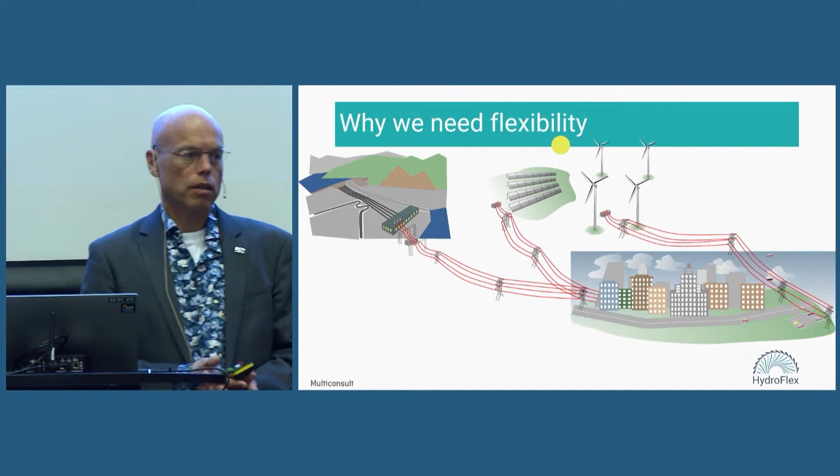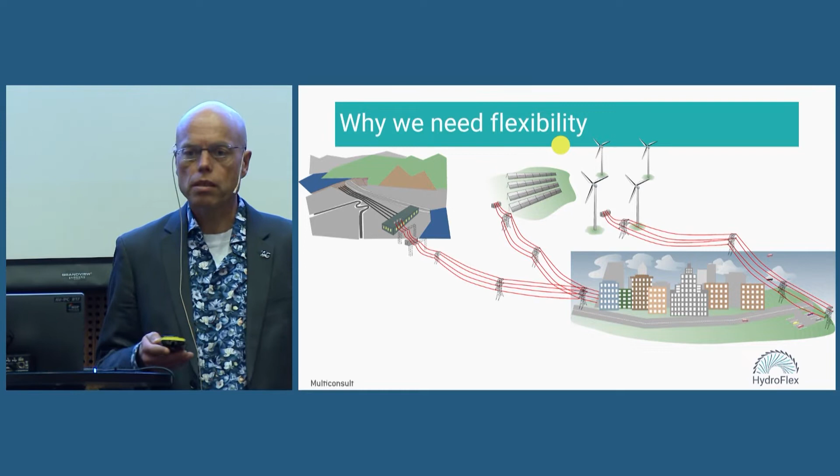With the recent events, both in terms of the energy crisis and security of supply, there's even more focus on having control over energy production and renewables, and in particular variable renewables like wind and solar are coming up as important contributions.

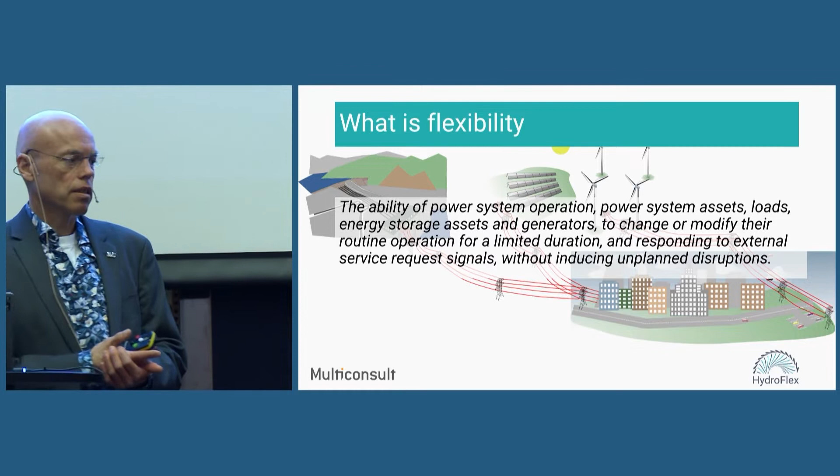The challenge with these variable renewables is that they are missing flexibility - the ability to, in a controlled manner, determine when you want to produce or respond to changes in the system. This can be both on the production side and on the consumption side, so you can have consumer flexibility too.

At the basic level - I'm a mechanical engineer, so I'm simplifying a lot, and I apologize to all the electrical engineers in the audience who have had courses on power system management - but from my simplified view, at the basic level, we need to ensure balance between power production and power consumption.

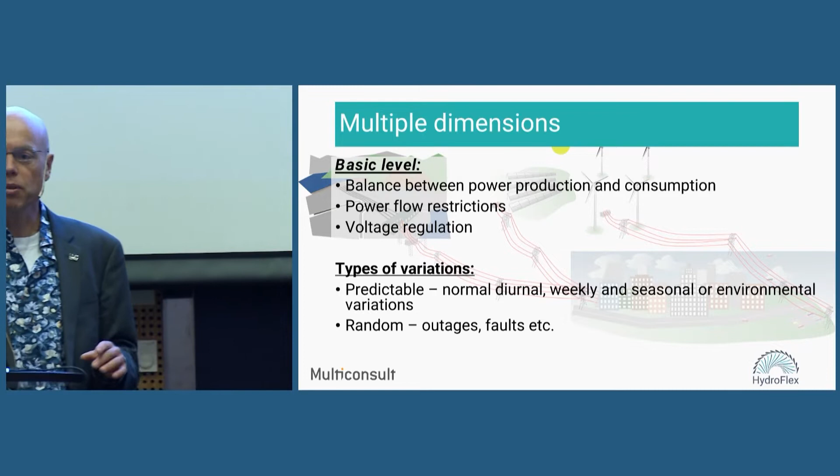At the same time, we have to satisfy the power flow constraints, so there's also a geographical component to this. That's what we've seen from Peter's presentation - in some of these simplified models where they talk about a copper plate, if you have perfect connection within all of Europe, you could easily shift power from Sahara to Denmark, but in practice that's not working.

So we have to also look at the geographic distribution, and then you have to locally manage the voltage in the grid, because there's also this local property.

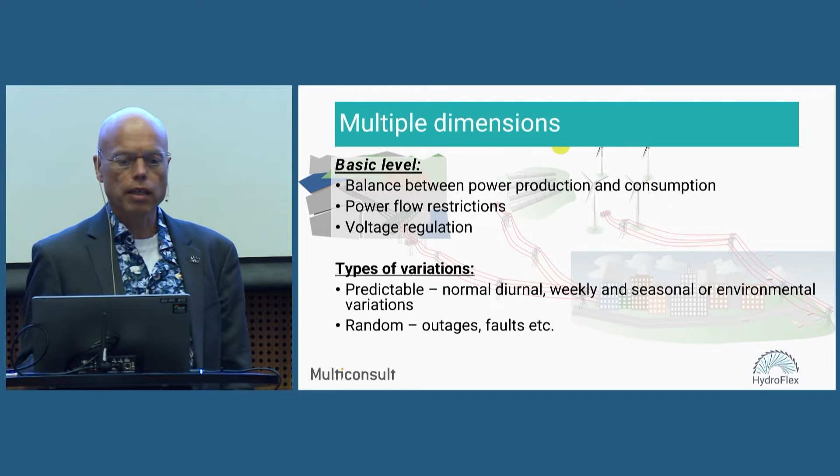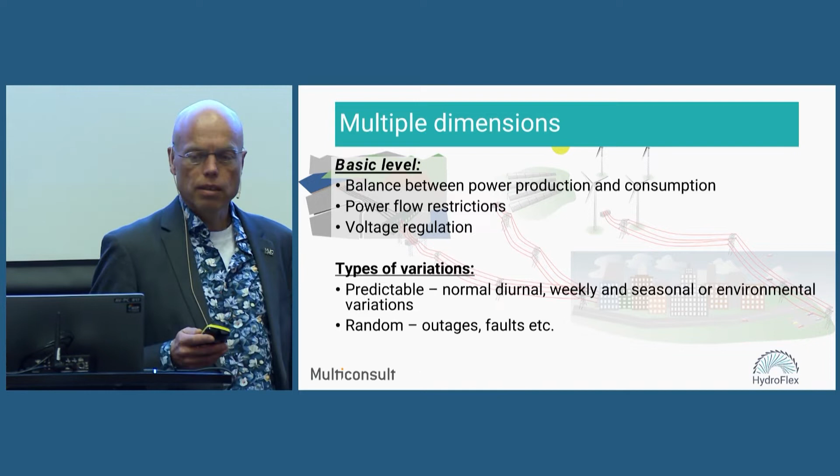Of course, those planning the system have both predictable changes - they know the typical daily cycles, weekly cycles, etc. I heard someone working in the Nordic TSO call it the badstutimen, the sauna hours. In Finland, they see a peak around 8 o'clock because all the Finnish want to turn on their sauna for their evening sauna.

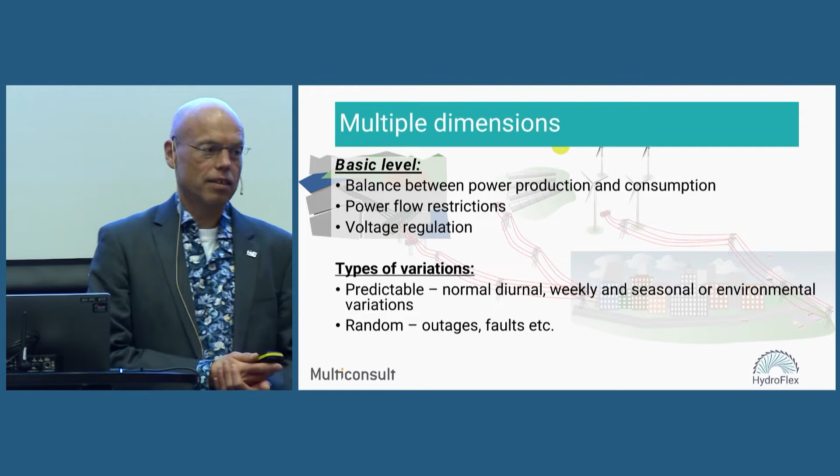It's also interesting from the Dinorwig power plant in Wales - they show very interesting graphs, like during the interview with Lady Diana, when there's a commercial break everyone runs to put on the kettle, and you can see these huge spikes. So there's this kind of predictable, but also kind of random, behavior.

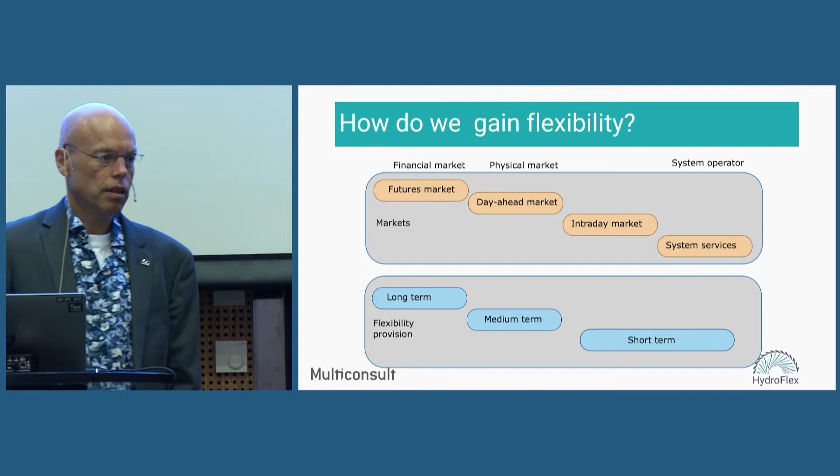So how do we gain this flexibility? This is a figure I've stolen a bit from work package 2. From the market side, we have futures markets, which is basically a financial market, and we have the different power markets - the day ahead market and the intraday market, which is the way in Nordic. Then on the very short term, we have the different system services that the TSOs are acquiring. So we have these different time scales in terms of the flexibility also.

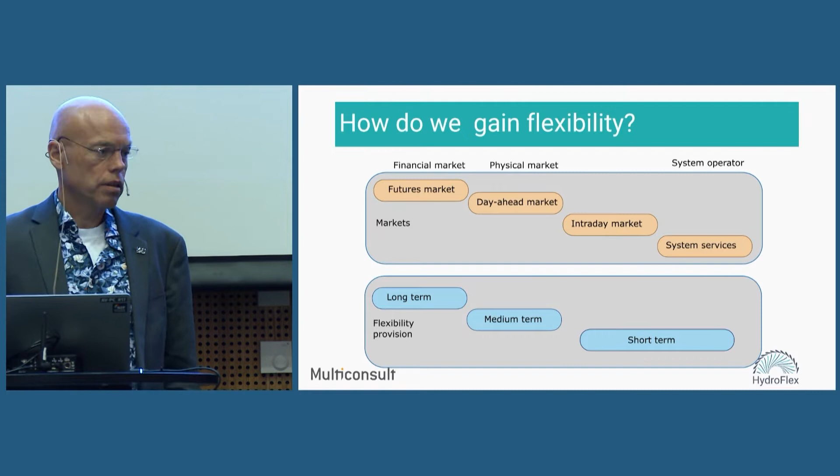As I mentioned previously, in particular in Europe now, we are in a tendency where, initially here in the Nordic, we are developing this Nordic balancing model, developing a common Nordic balancing market, and in the long term there seems to be a development toward a common European market, where they are trying to standardize.

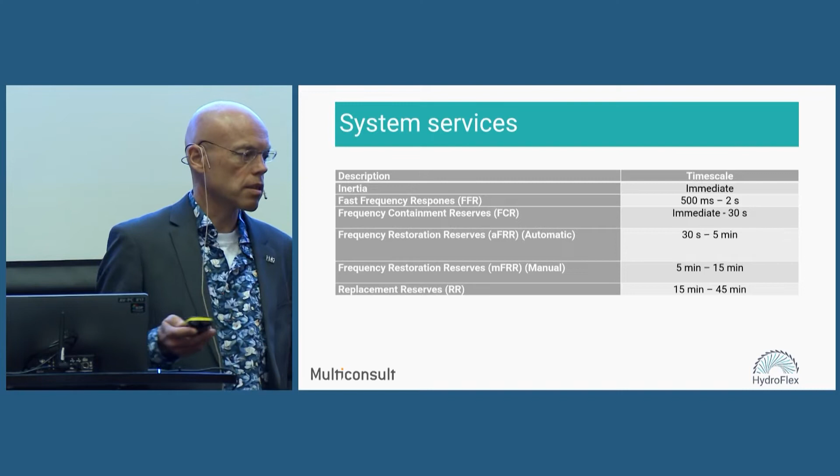Some of the values here are just typical values, but there are differences. In the UK, my understanding is that it's a bit different. They also have this DS3 in Ireland, so different areas, and the different TSOs in the US have different flexibility markets as well. So there's a lot of different market designs for how you solve this, which have technical implications for our hydropower plants too. But in Europe, and particularly Nordic, there seems to be this convergence through system services that are marketable in different manners.

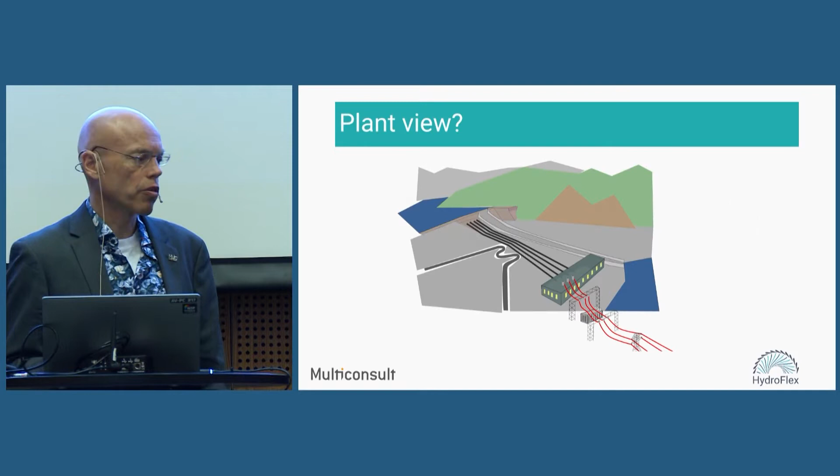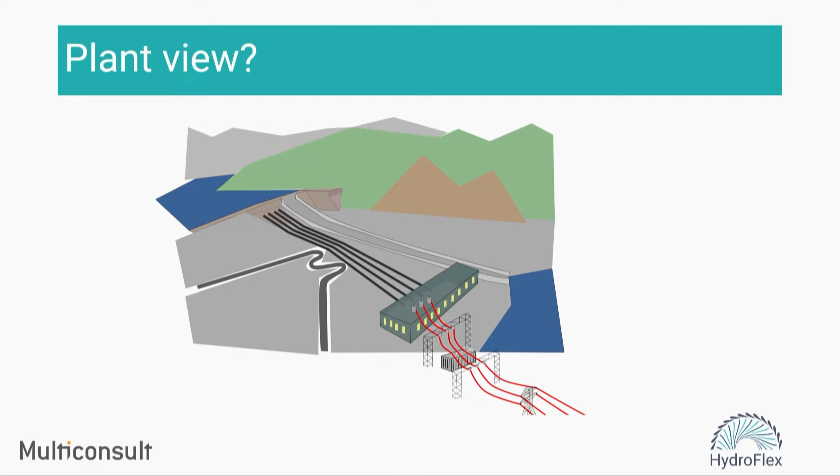So looking now from the hydropower plant view - what is the impact for my hydropower plant? I want to try to develop it more flexible. So some of the parameters I'm looking at, that I can develop or design depending on the refurbishment project, is the storage capacity, because that's the ability I have to shift power around.

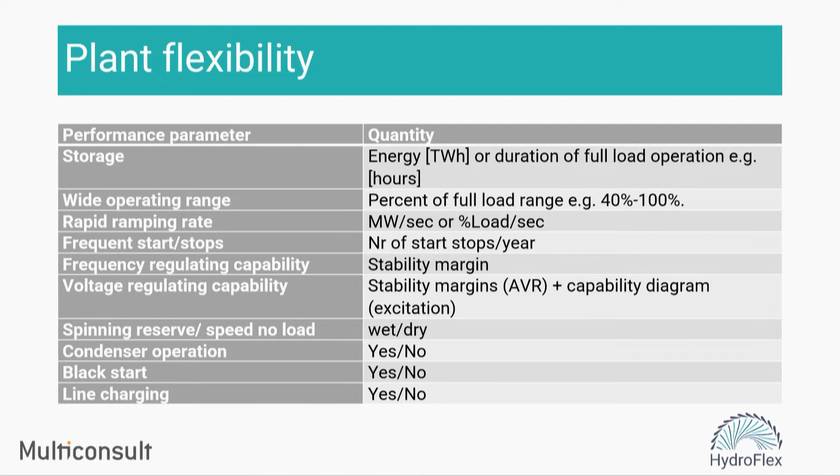It's this wide operating range, which is something both Igor and Urban have been mentioning, both these variable speed drives and what they're doing on optimizing the design for operating at a large range. We've talked about this rapid ramping rate, which was one of the 30 start-stop and increased ramping rate goals. I don't think we ever quantified that increase, which was one of the original goals of the Hydropower Hydroflex project.

And then we can also look at different technical requirements on the regulating or the stability, the ability to do large voltage regulation, the ability to run at spinning reserve, and you can run it in compressed air mode - running dry, having low losses, but also just running at spinning reserve, ready to produce.

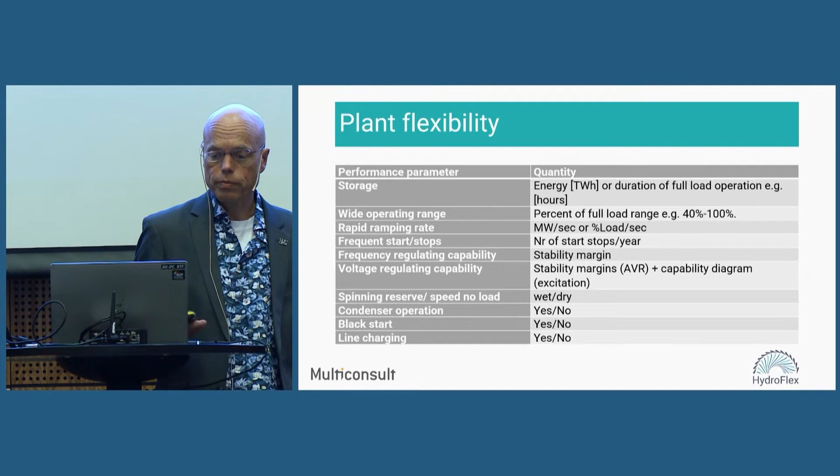And then looking at other types of services you can provide also. Considering this from my power plant, in terms of cost or equipment I need, I can consider - I'm not sure if barrier is the correct term, but it's what is opposing this in some sense. In terms of increasing the storage, that can be geographic, and there is also environmental and maybe social acceptance issues. In principle, often you can increase it, but there is also a trade-off.

You can increase the regulating limits, but that means maybe that people having their fishing boats will have to deal with stranding sometimes - it's also a big discussion. So the tendency is that they wanted to reduce it, but from a storage point of view we would want to increase that difference.

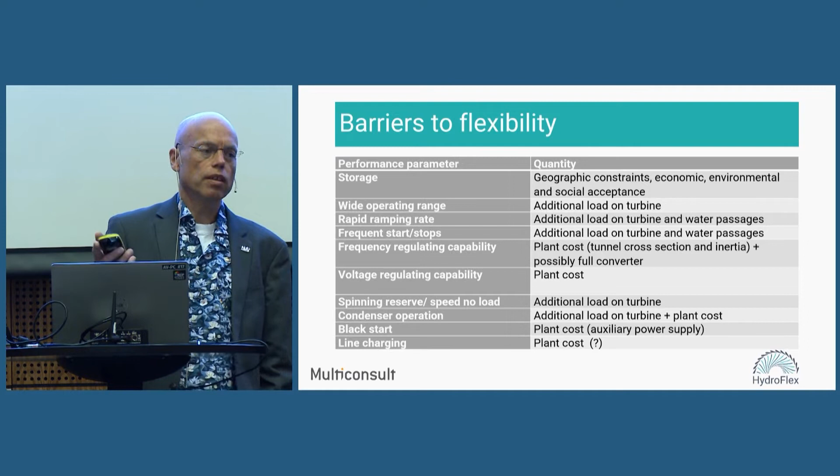Likewise, if we run at very wide operating range, we know that Francis turbines traditionally don't really like to run below 50%, or even 60% for medium head or low head Francis turbines. But we can do it, it will just have a cost. Likewise with start-stop, on large load changes we'll have more pressure surges that give stresses on the turbines.

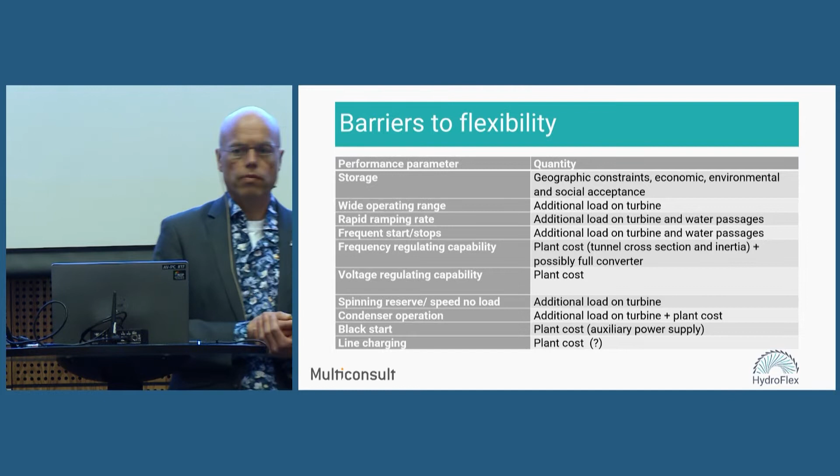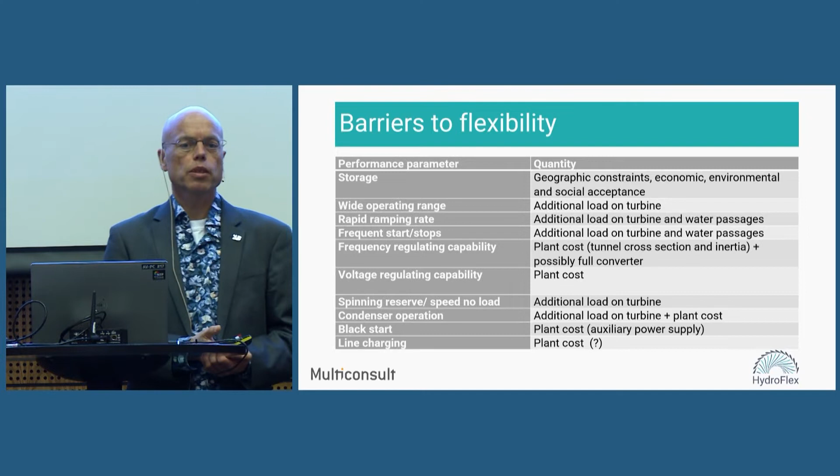Arne was mentioning that start-stops, on the generator side, maybe frequent start-stop is not so problematic because the machine is warm, so it's less thermal cycling. But you can see that if you had very few, then even increasing it a little bit, you may have increased stresses in the thermal cycling also.

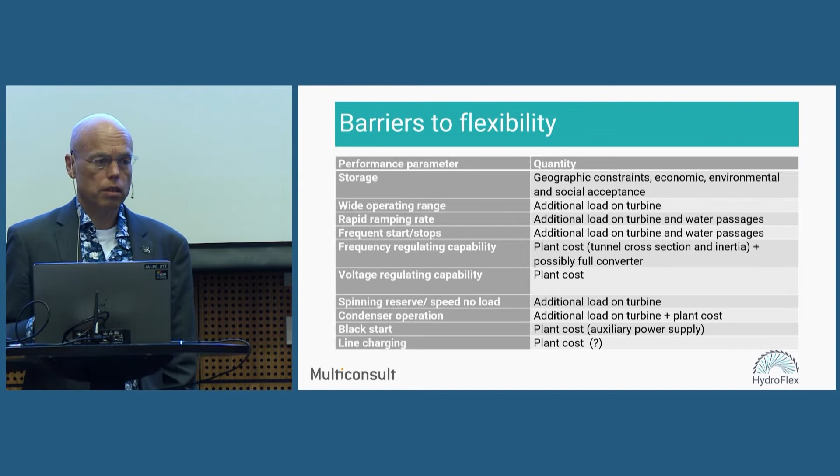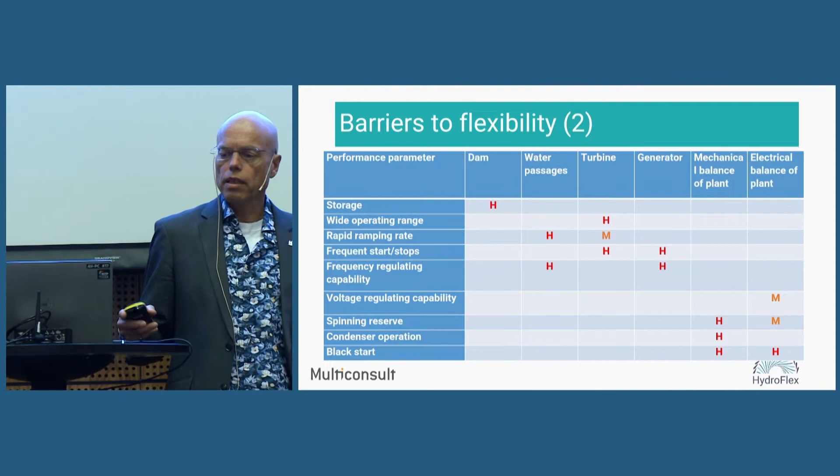So trying to summarize this is a bit simplified here, but this matrix tries to show where there is high impact on the different types of flexibility on the different components, or medium impact where it's expected to be less severe. This is a very general view, and it's going to be specific for each plant, but it's a first impression.

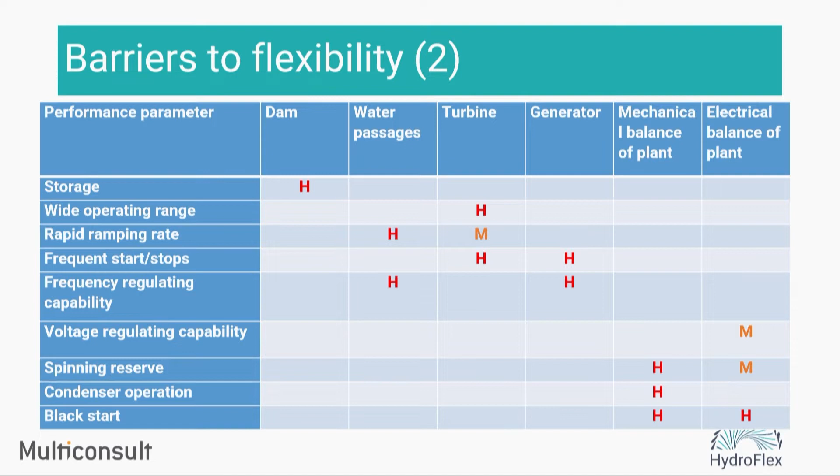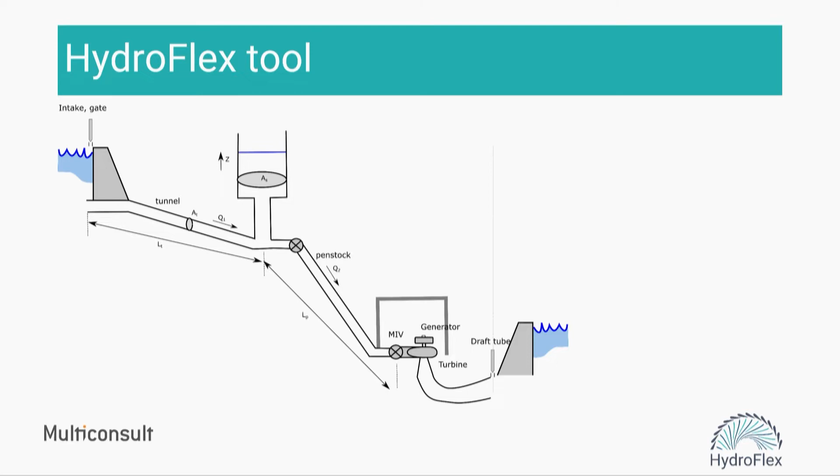So this HydroFlex tool is then a simplified model to try to account for some of these barriers. We have a simplified, generic model for a power plant, a Francis power plant, and the idea is to develop a tool that can illustrate the costs of different operating conditions or operating profiles. Actually, what I'm going to show is the different operating profiles.

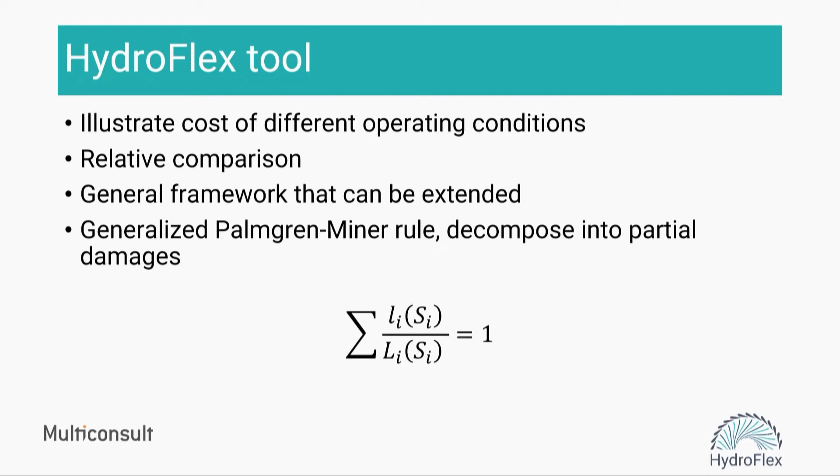And it's a relative comparison, so it's very difficult to get an absolute value. We've been discussing this a bit over lunch before, because everyone wants to have these life expectancy models for hydropower equipment. But ideally, they want very high precision while giving very little detailed input. So it's a contradiction.

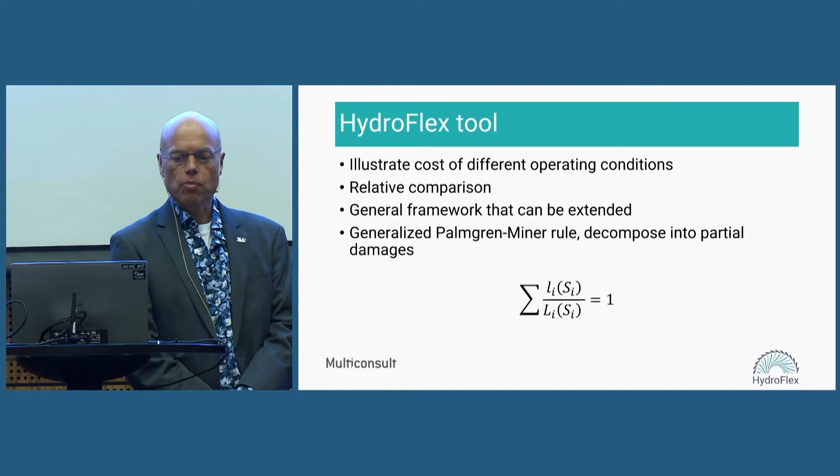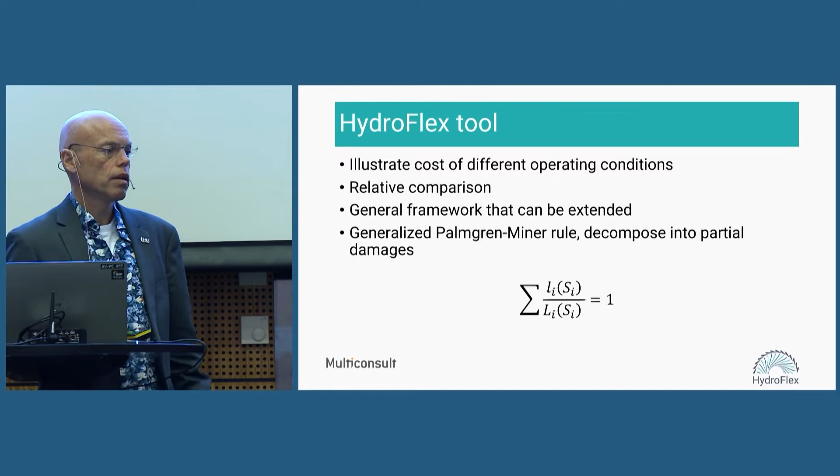But what we can do here is try to make a general framework that can give some ideas about this. Basically, it's based on this idea from fatigue analysis, where you say that different sums of different stresses in different regions, cumulatively, are eating the life of the unit. So here we're just generalizing the kind of idea, not saying anything specific. What is the driver? Each different kind of operating mode has a relative contribution to using up the life of the turbine.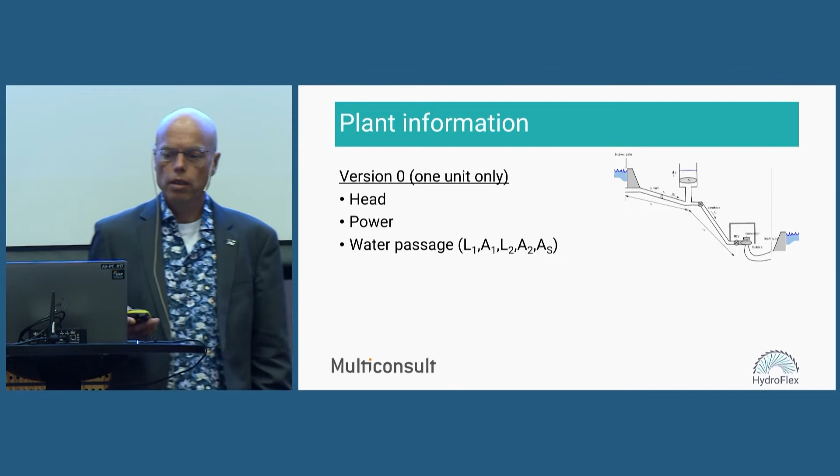So in this initial version of the model, we have a quite simplified hydropower system, and we compare this, or define a certain number of parameters to define the operating profile. The operating profile is defined by the number of hours of operation per year, the number of start-stops, and the percentage of operating within these predefined regions.

So we define this: speed no load, which is spinning reserve. We're not considering the electrical system here, so we do not really distinguish whether it's synchronized or not. And then we have low partial load, around the best efficiency point, and full load.

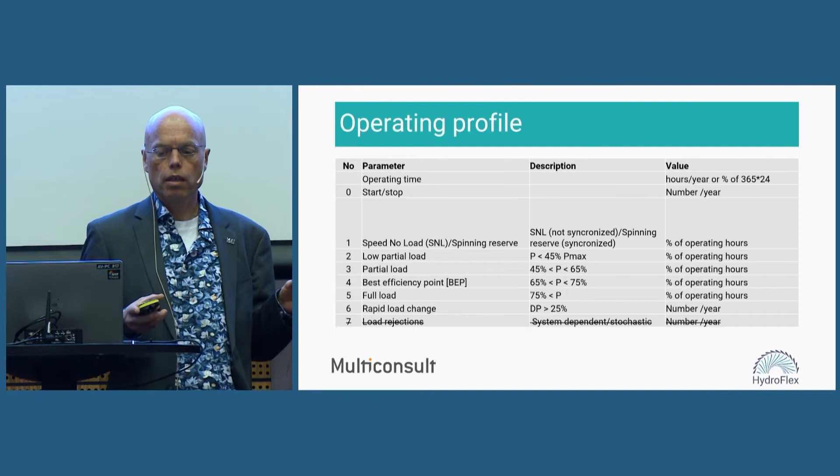In addition, we take into account rapid load changes. We say if it's a load change of 25%, using the full governor ramping rate, that's the rapid load change.

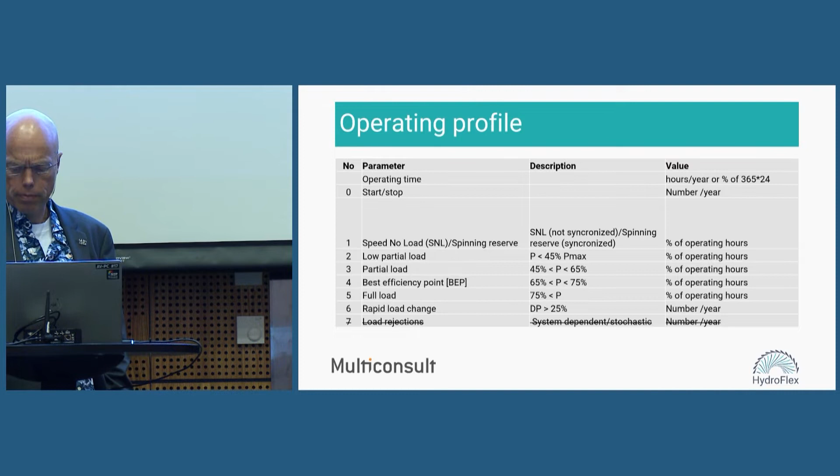And then we use a reference operating profile, which at the moment we're still working on calibrating a little bit more, but basically it's a traditional high-head power plant in Norway, which has about 5,000 hours of operation. So maybe one start-stop per week, so 50 start-stops, and then mainly working around the best point, and then full load, with very little operation at part load.

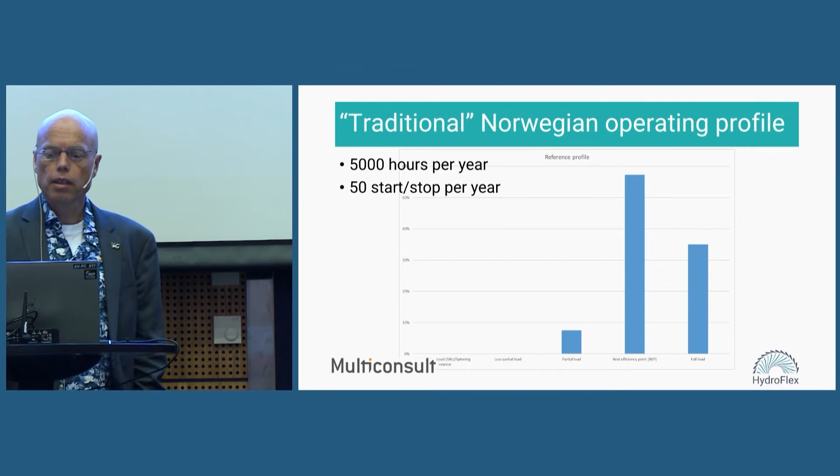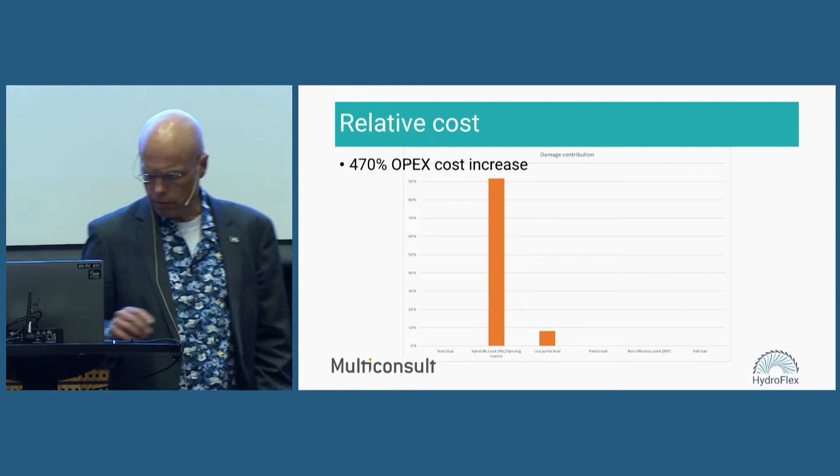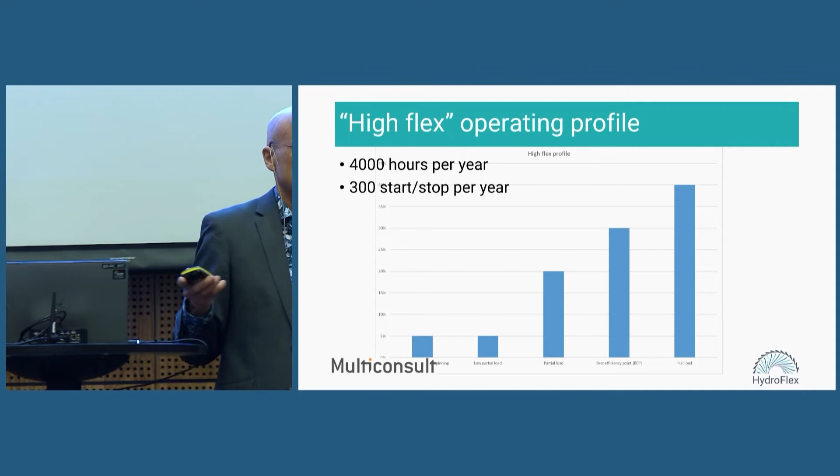And the figure also shows the contribution in the model from the different changes. So even if I didn't operate that much at this speed no load — to the most to the left — in the model at the moment, this is the operating condition contributing the most to the damage of the runner.

So this is still not final — we have one more month before we release the model on the website. We have some more work to do to calibrate and fine-tune the model. In particular, we hope to incorporate more results from the model testing, so that we can get the latest model test results and have some discussions around that.

At the moment, this rapid load change ramping is not fully implemented, and we will work one more round on implementing or calibrating and documenting the parameterization of the model.

So this is a very simplified concept, but it can give some idea. If you are considering changing the operating pattern of your turbine or your plant, this can give some information about the impact. And it's the first useful tool.

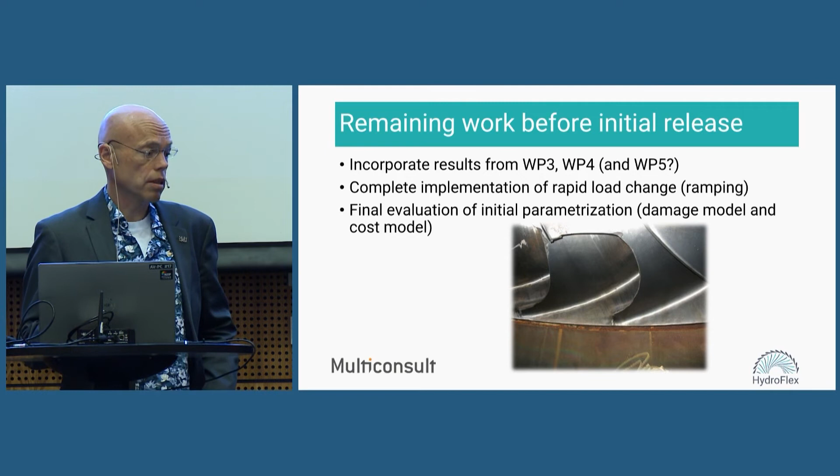So this is a conclusion. It's a purely empirical model, so we only get data out from what you put in terms of the parameters of the cost of the different operating regions, which is what we have done.

We don't have any model testing or test rig, so what we have done is go to the literature and look at all the different publications on what different simulations and different experimental results are published, and then try to aggregate that.

And it's also a deterministic model, so it doesn't account for—I mean, this is clearly a stochastic problem, so it should probably be looked at with a more sophisticated stochastic model so that you get a probability distribution instead. But it's an initial attempt.

I think it's a simple framework that we can use to evaluate the impact of the operating profile. We can use this as an initial relative comparison to see: if I'm changing my operating profile, how is that impacting things, can I expect that to impact my cost?

And we can start then to pull out, if we can get a good model for some of the systems, we can try to combine that with a simplified model, and then maybe, when we have more advanced digital twins, for the turbine, try to combine these together.

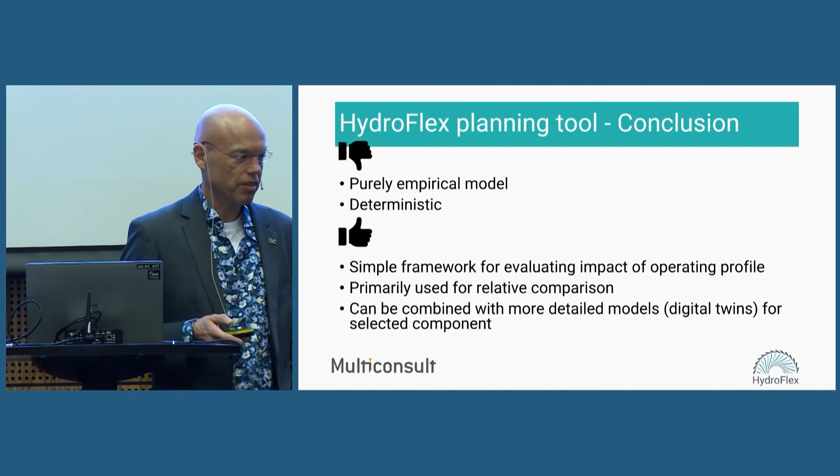In the flexibility list that you had, what constitutes a flexible power plant—power wasn't part of that on your list there. The amount of power, do you consider that as a given? Because increasing the power in power plants can add flexibility.

Yes, you're right, I agree. So that's that. But in this case, it's taken as given.

What we have seen, in a lot of cases, you can compare, for instance, hydropower plants—as I said, a typical Norwegian hydropower plant has somewhere between 4,000 and 5,000 hours of operation, and I think a typical Swiss plant has between 1,500 and 2,000 or something, because they've increased the capacity so much and they're much more focused on peak power.

So in some sense, in terms of the model, you get it in terms of reducing hours and then changing the profile. But you're right, yeah.

A question: can you introduce the results coming from the runner now, from the strain gauges? Can you bring that into the model and utilize those results, or will you do it?